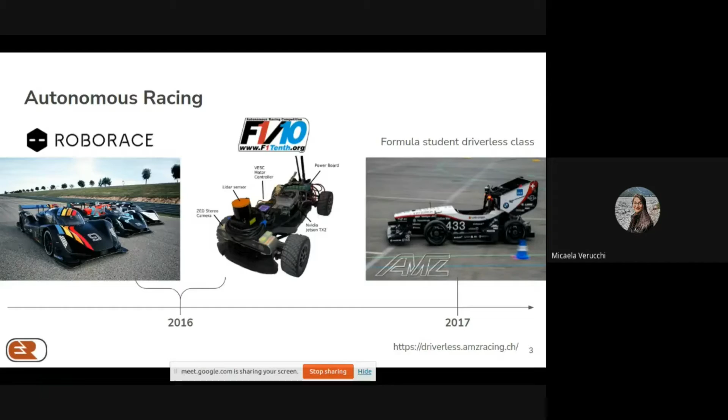Then in 2019, the ESN Energy Systems Network with the Indianapolis Motor Speedway started to think about a new competition, a new international competition in which several universities around the world could participate. Initially, the goal was to have a multi-vehicle competition.

Then in November, they set the rules and the format and opened the registration for a $1 million first prize race competition. In order to achieve this goal, they scheduled 5 rounds with different kinds of goals, including a simulation race in order to prepare for the final one.

It was quite successful since the beginning. A lot of teams registered around the world, more than 30 universities, 16 teams participated in the final simulation race, and 9 of these 16 accomplished participating in the real one at the Indianapolis Motor Speedway.

Now let's talk more about the track. For those not familiar with oval racing, it could seem something quite easy. You see 4 turns, you could say it's quite simple to drive around it. But you should consider it's a 4-kilometer rectangular oval track with 2 long straightaways, 1 kilometer long each.

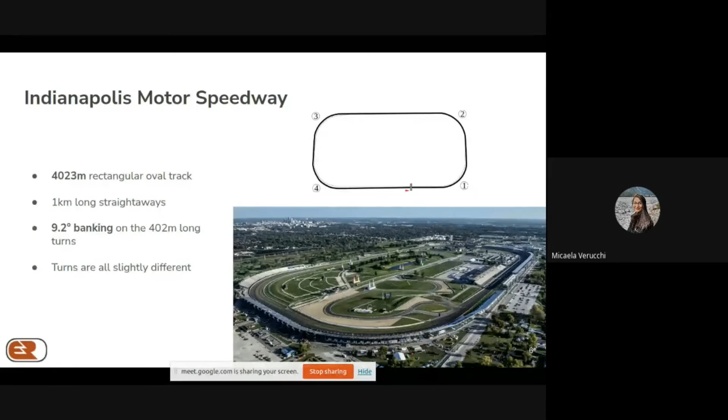On the straightaways you can achieve even 300 kilometers per hour. You have 4 banked turns up to 9 degrees of banking, and even if they seem quite similar, all the turns are actually slightly different.

Now let's talk about the vehicle. The organizers set the challenge to use the same vehicle for all teams. Dallara USA and Deep Orange worked together to create this car. It's based on the Dallara Indy Lights chassis, the same chassis used for the Indy Lights competition, with the oval aero setup. The engine is different.

It's an Honda engine with 390 horsepower. It's designed, as I said, by Deep Orange, which is a research group from Clemson University. The setup and mechanical adjustments have been done by Juncos Racing.

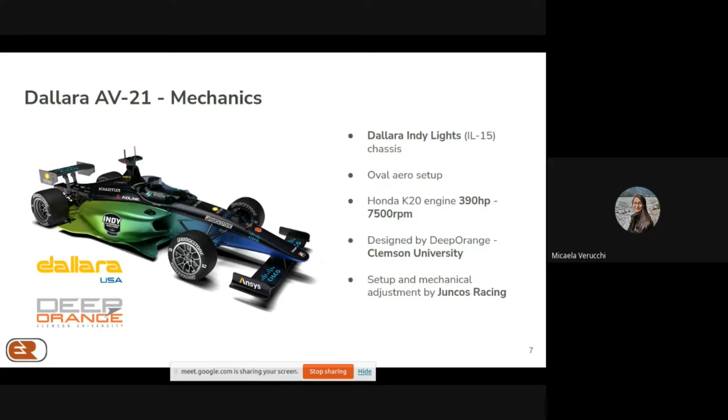About the electronics, it's equipped with ADLINK with a Xeon CPU, RTX Quadro GPU with 64 GB of RAM, and a Cisco switch, whose main goal is to let all the sensors be interfaced with the computer and all the other modules. There's also an ECU called the New Eagle Raptor, whose goal is basically to communicate with the actuation, making it one of the most important components in order to actuate the steering and the throttle. Then there's the Fluidmesh, a wireless module that lets you communicate with the car wirelessly, so from the pit you can communicate with the car thanks to this module.

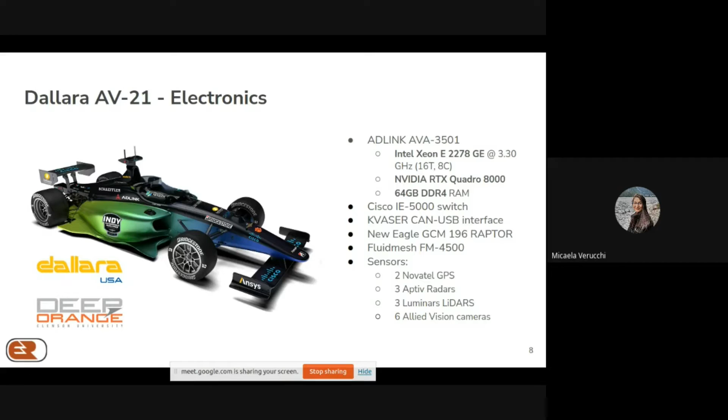About the sensors, we have 2 Novatel GPS units, each with 2 antennas, for a total of 4 antennas. We also have 3 radars, 1 frontal and 2 on the sides, 3 Luminar lidars, and 6 cameras.

Okay, now let's have just a quick view of autonomous driving, for those who maybe never heard anything about that. Since it was an autonomous race competition, we had to develop the code for autonomous driving. In general, what you have is you start from the hardware, and the hardware is not just your CPU or GPU, but includes also all the electronics and the sensors. So everything that is hardware is on the base.

Then you have to start communicating with the hardware, and especially with the sensors. You have to process all the signals.

Maybe from just the cameras, but also the lidars and every sensor that you can think of, you have to handle all of them. And given that you can have more than one sensor, you also want to do some sensor fusion. So you have to synchronize your sensors to be sure that the data you're looking at is at the same time, or do something more difficult, more complicated.

Some of the sensors are there to tell you what's around you. So you need them to perceive the world and see what's in your environment. But to do that, you need to perform some tasks, for example object detection and tracking. You want to detect these objects, but also track them, because you want to recognize it's the same object across iterations.

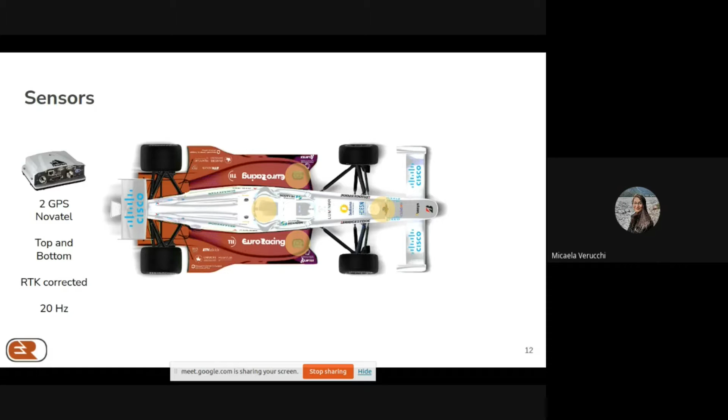Then we had 3 Lidars from Luminar, solid-state Lidars - it's a laser scanner sensor. Having 3 of them with a field of view of 120 degrees allowed us to cover the whole car. Also, as already mentioned, we didn't decide anything about positioning the sensors - it was already decided by the organizers.

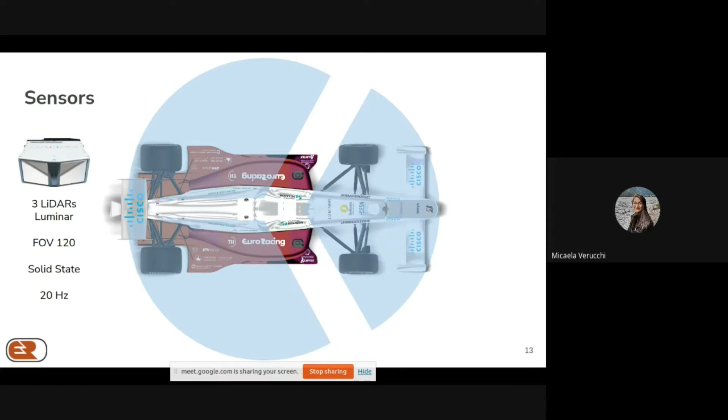Then we have the cameras. We have 6 of them.

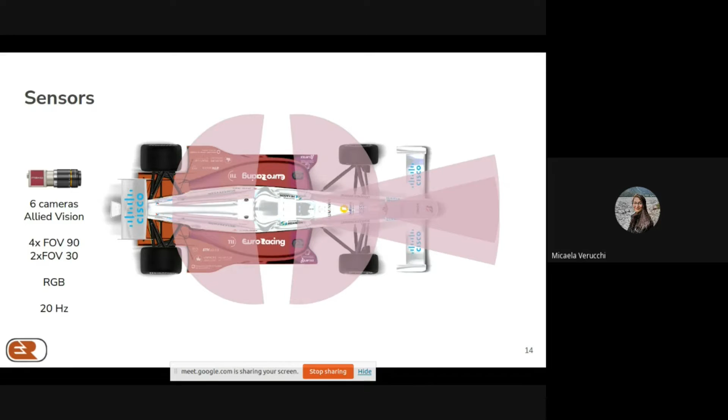We have 6 cameras, and they're slightly different. We have 4 that are the same, with the same field of view that covers the whole car, and then we have 2 additional ones in the front with a smaller field of view. They are all RGB cameras, and they run at 20 Hz.

Finally, we have the radars. We actually had 3 radars in the car, but we decided to use only one, the one in the front. The radar had 2 kinds of field of view: one larger for closest objects, and one smaller to see farther. This one was running at 10 Hz.

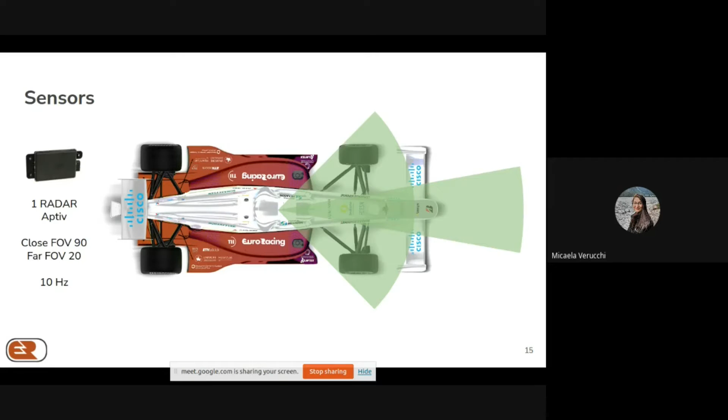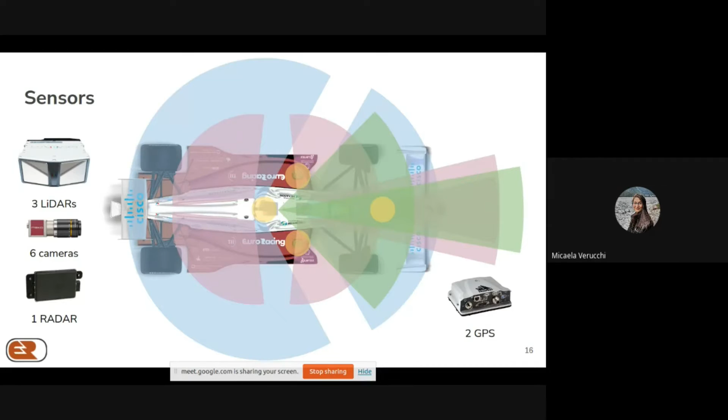Here you can see the whole overview of all the sensors, so how the car was completely covered. The car was completely covered. But let's start from how we handled those sensors.

Let's start from the cameras. On the cameras, we decided to perform object detection with a neural network. What we did was take YOLO V4, a neural network very famous for its real-time performance. We retrained it to detect Formula 1 cars, because they're not like the urban cars we see every day. We retrained it and optimized it on our internal framework called TKDNN.

On that, we also performed distance estimation to see how far the car is, based only on geometrical information of our lenses. And of course, we also implemented object tracking to be sure that the car we detected was the same in the next iteration.

The problem is that we achieved only 10 frames per second on the GPU for 6 streams. Why only? Because we expected our performance to be higher, but the GPU we had was the RTX 8000. That's a very good GPU, but for training, not for inference. So it wasn't the best one for inference, and in the end we decided to use only 4 cameras. One good point of the camera is that it can see very far away, almost 200 meters.

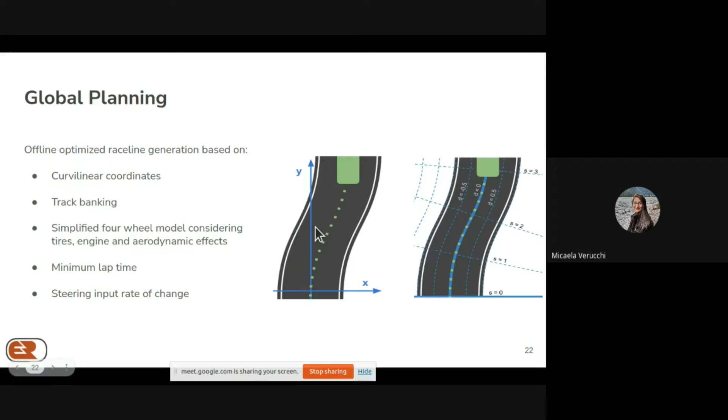In order to do this optimization, we don't use the classical Cartesian coordinates, but curvilinear coordinates, in which there are 2 components—the longitudinal and lateral—which are referenced to a unique race line. So each race line has a longitudinal progress component and a lateral offset.

This makes a lot of difference in the output signal of the car—let's say the smoothness of the final behavior of the car.

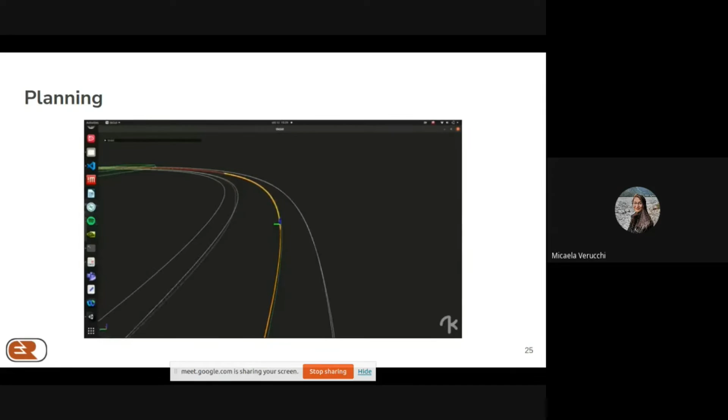So now let's see how it behaves in the real world, first using static objects, which is a scenario in which the planner works really great.

In the first one on the left, let's see first.

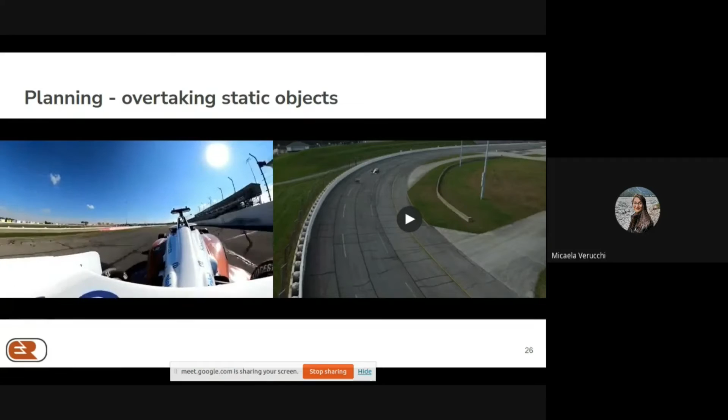In the first one you saw, it was overtaking those two pylons, which was also a component of the race after the single time trial. It was working quite good at 120 kilometers per hour, which I think is one of the highest speeds any team achieved during the whole competition while overtaking static obstacles.

In the second one, instead, we used some more classical boxes and tried to overtake on the turns.

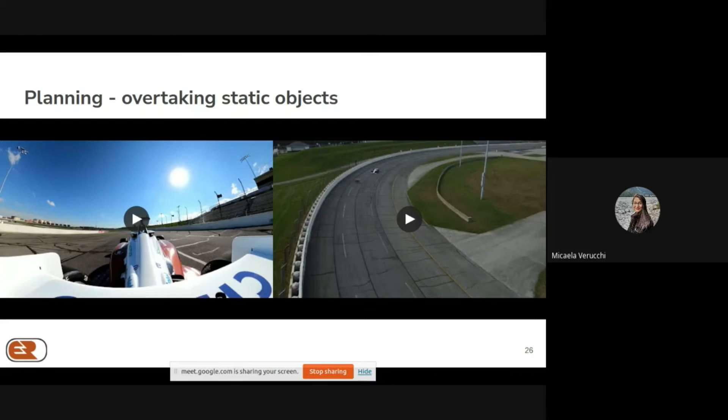Let's see if you can see it. Yeah, and it was quite smooth and fast in this scenario too.

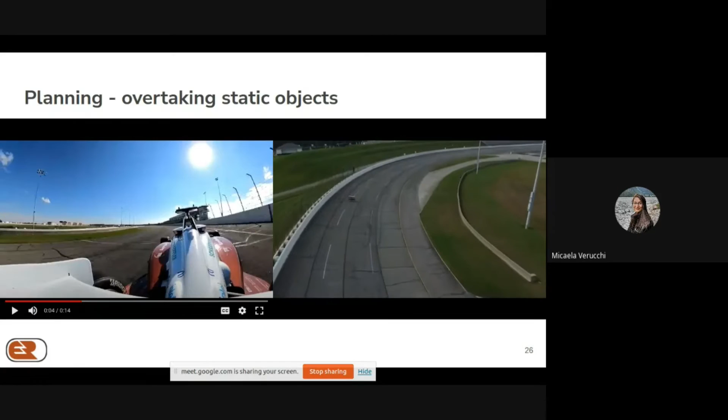Then now the case with moving objects—so with another car. This is, let's say, the most challenging part of the whole competition.

Indeed, as some of you already know, in the end there wasn't a multi-vehicle competition, due to the fact that there was really a short amount of time for testing, but also because the level and the challenge was quite difficult.

In our case, the planner was able to overtake other opponents. We tested with other teams, even if with lesser performance compared to the static obstacles.

Okay, so now let's talk about the other two modules that, to be brief, I've gathered in the same module: the supervisor and failure detection module. These two parts are quite important, maybe one of the most important parts in my opinion, which are not directly related to algorithms and heuristics, but more behavioral.

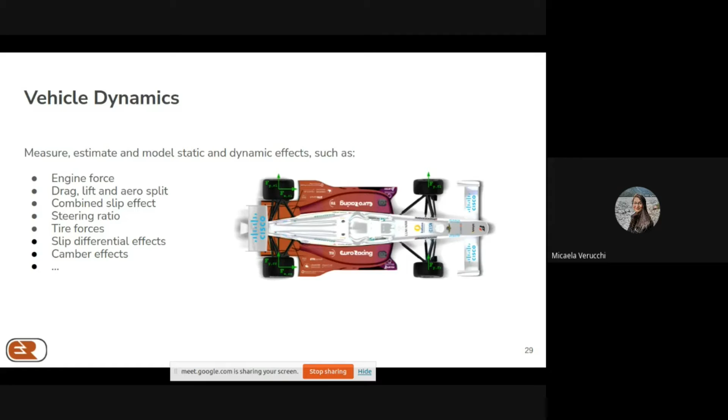For example, to focus on a part that was quite important for this challenge, the tire model: we based the model on the Pacejka magic formula. For those who don't know, as you can imagine from the name, the magic formula is not a proper physics model of the tires, but a model using 4 or 5 or even more coefficients, depending on the kind of formula - in this case B, C, D, and E - that fit some data of the tires.

Usually the data is collected using the slip angle versus the forces, lateral or longitudinal, and then you have to fit this data with your model. The data we gathered was basically from the Bridgestone tire file, files with coefficients already from tires tested in a static environment, not directly on a car on a road doing particular maneuvers. So it was a good starting point, but not exactly what's going on with the car.

So in order to simulate this, we used some multi-body model simulation, which we'll talk about more in detail soon, and then collected real data on track in different conditions. Another thing to add is that the formulations shown here are really the basics of this formula, but then, with the collaboration of Megaride, a startup from the University of Napoli, we added other parts to consider other particular effects of the car.

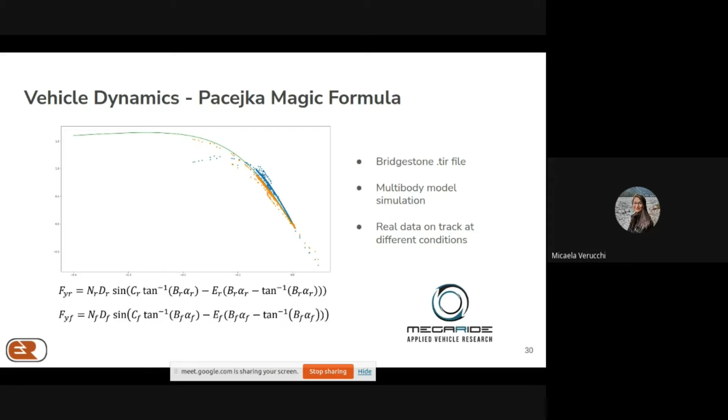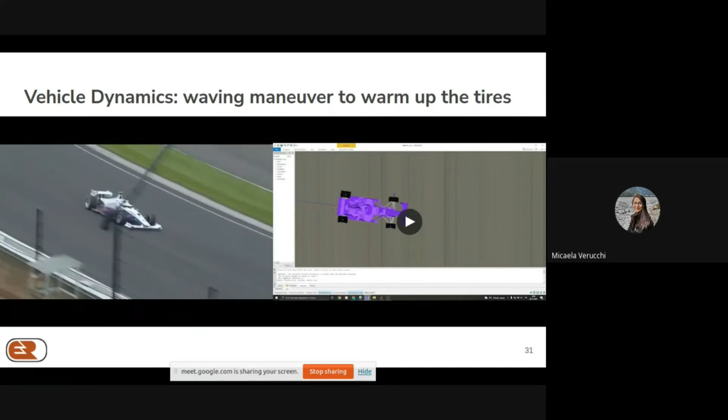This was quite important in order to create heat on the front tires even before going too fast, because you can heat the tires going faster, even 200 or more, and maintain a certain speed, but this can be dangerous since the front tires, which give the directionality of the car, are quite cold.

So now let's talk about the control part of our stack. We basically use a model predictive control for higher speeds and, let's say, performance lap times.

For those who don't know, model predictive control is an algorithm that has been used for several years for industrial topics, but in the last 10 years or so has been used a lot even in autonomous driving, due to the fact that we now have computers with higher performance.

It's based on a model. Basically the algorithm is that you have a plant, in this case the vehicle, in which you have some inputs - steering angle, throttle, brake - and the state of the vehicle. In our case, the position X, Y, heading, the speeds, so longitudinal and lateral velocities, and the yaw rate.

Then we have a model of the car - in this case a single track model, I'll give you more details soon. Using this information, the state and the model, you can predict the future states. And using a reference, in our case a local trajectory with path, velocity, and other references, the algorithm checks the future errors, and having a solver, can understand what are the best inputs to give to the car for the next steps.

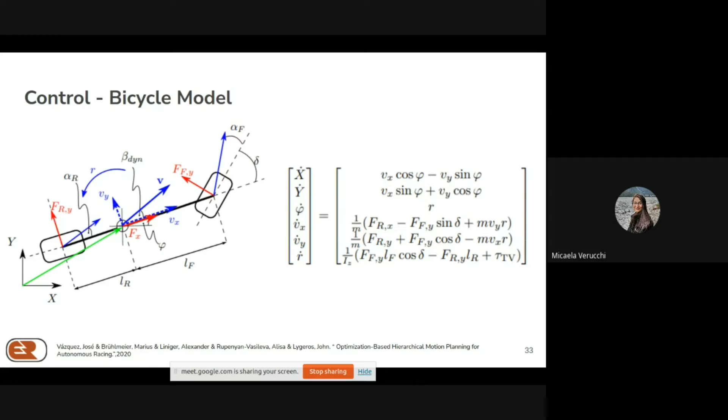One difference with respect to the other model we used is that it's not in Cartesian coordinates, but in curvilinear coordinates, similar to what we did in the offline optimization to generate the trajectory.

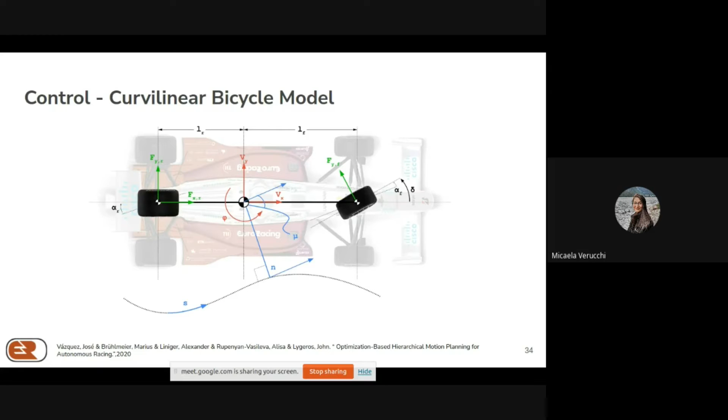This is something that, if you want to check more in detail in the reference, you can see that having less difference between the offline optimizer - the global planner - and the control, so the way in which you generate the trajectory and the model you use to control the car, it gives you less tracking error, a solution closer to what you expected during the race line generation and optimization.

So briefly, some results. From a computational heaviness point of view, it was quite good. Of course we had a really huge computer with a big, really performing CPU, but the execution time was lower than 10 milliseconds.

We kept the frequency fixed at around 100 hertz without any particular issue. The horizon length of the prediction was about 50 steps, with 50 milliseconds each time step.

The tracking error was really low at lower speed, and then a maximum lateral offset of 40 centimeters from the path tracking. Here I said lateral offset and not tracking error, since it's not necessarily a bad behavior - we let the MPC and the controller have a certain amount of room.

In order to accommodate the differences between the model you have in the MPC controller and the real car behavior - because you will always have a mismatch between what you have estimated and what it is in reality, due to track conditions, temperatures, and so on. You can have a model, estimate everything, get data, but then in the real world you will have different conditions, and your controller should still be able to behave correctly even if it's different from what you expected.

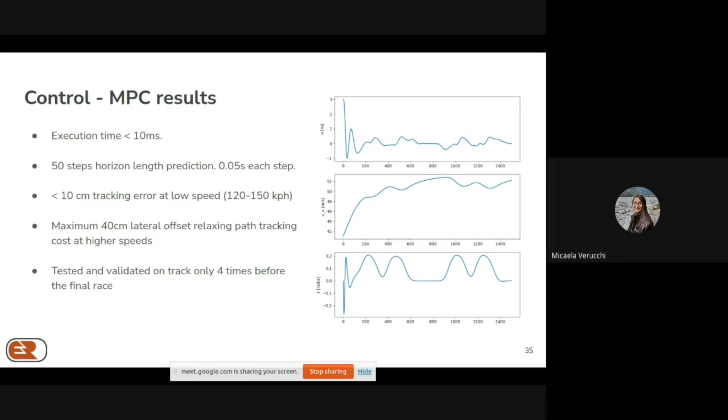Another consideration is that this controller has been tested and validated only 4 times on track, which is something quite insane, if I'm honest thinking about it right now.

So for low speeds and emergency maneuvers, for example when the MPC fails - even though it didn't fail even one time during real testing, but even in simulation, in case the MPC fails, or there are other issues, or we need to go at lower speed - for example, in all our low speed maneuvers we were using this controller.

So a pure pursuit, which is an algorithm that's more, let's say, a geometric path tracking algorithm, in which you have a path composed by waypoints, different points, and starting from your position you check the next pose you want to achieve, considering a value called look ahead. This is quite good for low speed, and it's also quite fast, so you can run it at 1 millisecond, 2 milliseconds without any issue. It's also, let's say, deterministic.

But the issue is at higher speeds, since it's something that's only geometric, it doesn't contain any model. If you start to have a higher lateral offset from the path, so you have a higher tracking error, you will probably lose the car. This is the reason why I said before that those 40 centimeters of the MPC, letting it be quite relaxed and free to work in this range, was a good thing. Letting this kind of controller have all that freedom could almost for sure bring an accident.

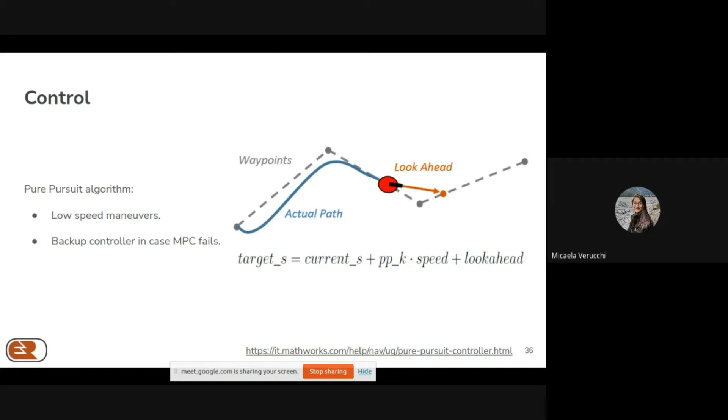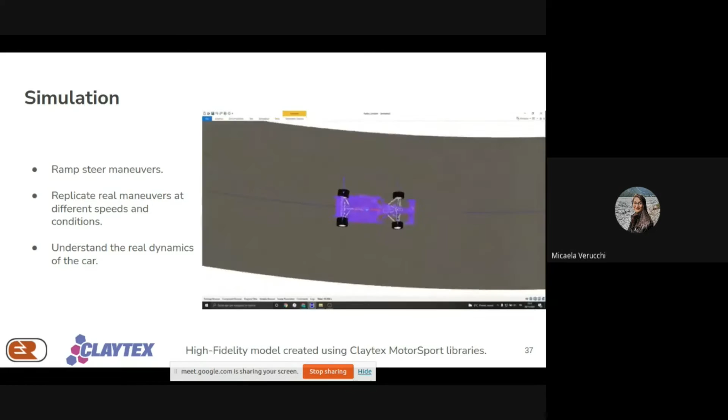So for the simulation, we had several options, different simulators. For the part related to vehicle dynamics, we have a simulator based on Dymola and Claytex libraries. The goal of using this simulator is basically to do some maneuvers that can be done in the real world, like the ramp steer maneuver, and also to replicate some maneuvers at higher speeds or different conditions.

Also, a thing that was quite important is that this tool helped us understand the real dynamics of the car. Some of the vehicle dynamics guys of our team spent months modeling and setting the right parameters for the model to have a high fidelity one. It was quite useful to understand the dynamics even before having the car in Indianapolis.

The issue with these kinds of simulations is that they are quite heavy, and it's not easy to interface with them - to get the inputs, outputs, and communicate with them. So it's quite difficult to run your whole software stack on this.

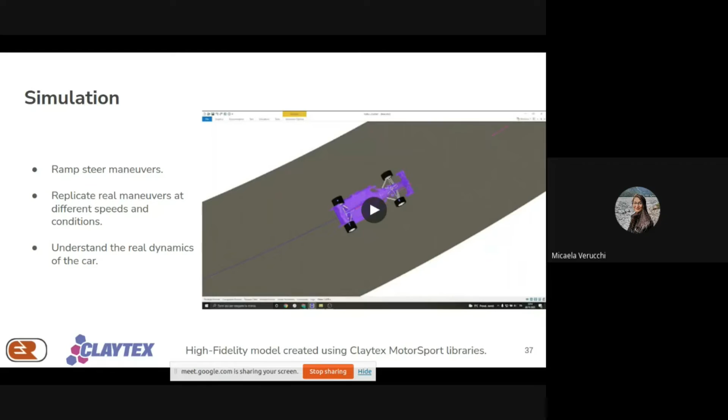So in order to have a good trade-off, we used another simulator, Assetto Corsa, in which we basically exploit the API, gather and send data from the simulator, and then send our commands using a virtual joystick interface. In this kind of simulator, we have in the control and planning part exactly the same software that we have in the car, so even the ROS2 interfaces and everything.

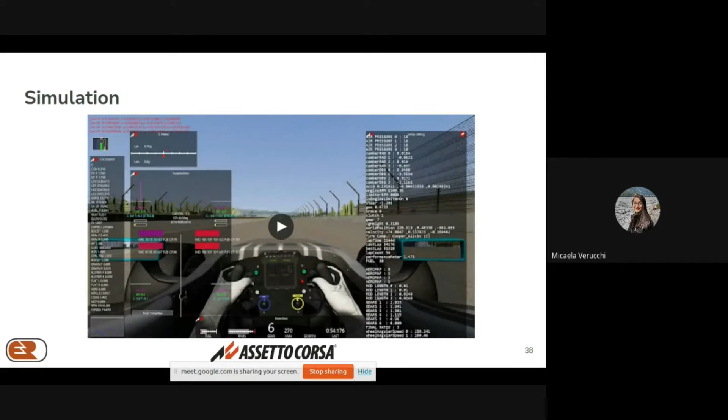But of course, we don't have the race control part, the supervisor. There are some parts that lack in this kind of simulator. But it was quite important in order to have something with dynamics that can simulate conditions quite closely. For example, we had the Indianapolis track, and we had the same Indy Light car, which we changed a bit to have the same engine model and some other parameters.

Then, in order to simulate the whole stack, including our supervisor, the communication with race control, the GPS - for example, which was basically ground truth from Assetto Corsa - we have the GPS also, and we could simulate a higher standard deviation of the GPS, a jump on the GPS, or even sending the race control flags, requiring the car to enter the pit and stop.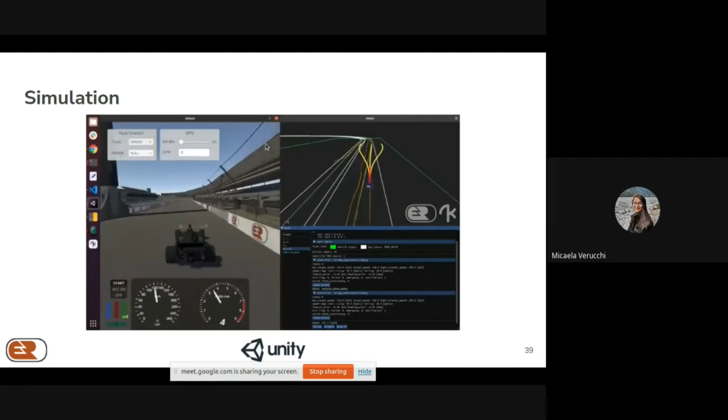So from all our code, what you can get for free or what you can learn - let's start by saying we used a lot of tools. We programmed everything almost entirely in C++, but we used a lot of tools for simulation, processing, sensor side, control side, and so on.

And we already released in the past some code that had a lot of parts common with our software stack, like in the controller, perception, or simulation, or also our old software stack used in the F1/10, which isn't exactly what we used for this race, but you can get some hints about it.

Okay, so Ayub explained everything as we thought, as we implemented, and also all the simulation part. So of course, before testing anything on the car, what we did was test it in simulation, try it in advance. But the point is that, as Ayub already said, simulation and reality are not the same thing, and something can go wrong.

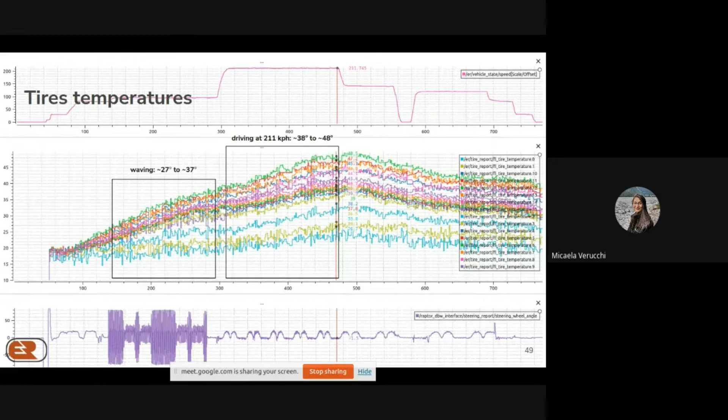The final, Polimove starts, and actually they do very good also in the warm-up because they hit a peak velocity of 250 kilometers per hour, let's say an instant peak velocity. But then they have a problem with the GPS and they lose the car, so they have a very bad crash.

Then there is TUM, and they have a very clean run, and everything is good, and they actually do a very good job. And then there is our turn.

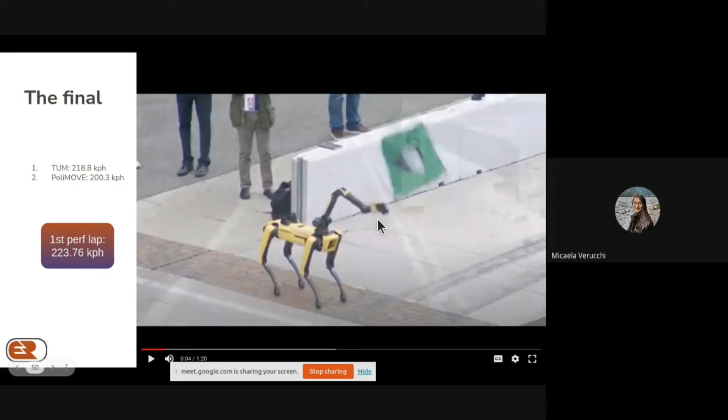Five miles left in the Indy Autonomous Challenge powered by Cisco. EuroRacing trying to knock TUM off the top step. Coming into turn one, posting straightaway speeds up over 140 miles per hour and keeping those speeds up over 140 through the corners, Rob. Yeah, they're on it right now. No problems, they're looking great. Got through the short chute, no problem. Off the corner, brought down that long back straightaway.

This could be competing philosophies here. TUM electing to go for the high straightaway speeds, but backing it down for the corners. Much more consistent for EuroRacing with speeds both through the corners and down the straights, hovering right around 142, 143. Not really pushing it any higher down the straightaway, but these center corner speeds are really high, and this is looking pretty promising for him right now.

The speed to beat: 135.944. That is a 2-lap average, and the record for an autonomous car on an oval set just a few minutes ago by TUM Autonomous Motorsport. EuroRacing across the yard of bricks. The first lap is complete. It's a 139.009 miles per hour. Wow.

Okay, so the first lap, we actually did the record, right? 223.76 kilometers per hour. And then...

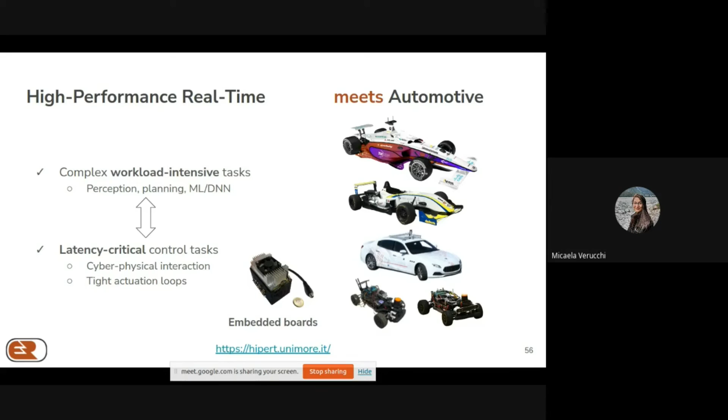One of the main use cases of the HiPeRT Lab is automotive. HiPeRT Lab really likes cars, different cars too. We actually started with small cars, the F1/10 I told you about in the beginning of the autonomous racing history. These F1/10 cars are part of an international competition among universities, actually a student project, where you compete with other teams every 6 months. We as HiPeRT won 2 of them.

But we keep participating in this kind of competition, and actually we're competing with 2 different cars, one mounting a GPU and one, the new one, mounting an FPGA.

Then we have projects with a real urban car, autonomous urban car, more related to European or national projects. Here you can see the final demo of Hercules, from some years ago. That is a European project.

While here you can see a project called MASA, Modena Automotive Smart Area, in collaboration with the municipality of Modena, for which we're still collaborating and still working on.

Finally, in the race field, we also have a Dallara Formula 3. Here you can see it's driven by our pilot, Nicola, but it's going to be soon autonomous, so we will work to make it autonomous. Here it's at the Autodromo of Modena.